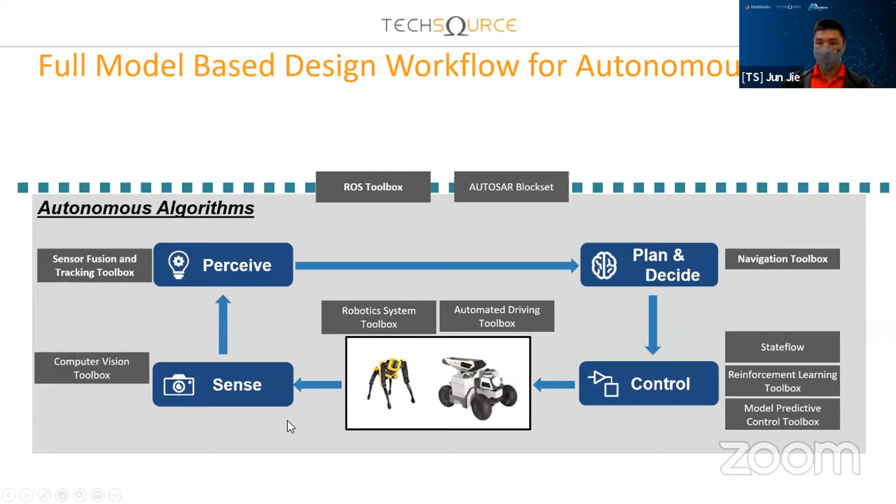So in terms of the navigation, these are the 4 key components that you will need in your design workflow in order to build the robot. So definitely you will have your sensors such as motion sensor, LiDAR, 2D or 3D, depending on what you are building. Then your cameras for image processing as well.

Then after collecting your data, you will need to process your data. So to process, your robot will need to understand all the data collected, such as for tracking an object or detecting an obstacle. And next, you will have to plan. So plan and decide stage. You track an object. Do you want to follow the object, or how do you want to follow, and how far do you want to follow?

So this one is like I showed you in episode 2, the turtle bot. It will follow the signs until the stop sign. So that's one of the examples. Then finally, after you plan and decide, you want to send in your controls on what you want your robot to do.

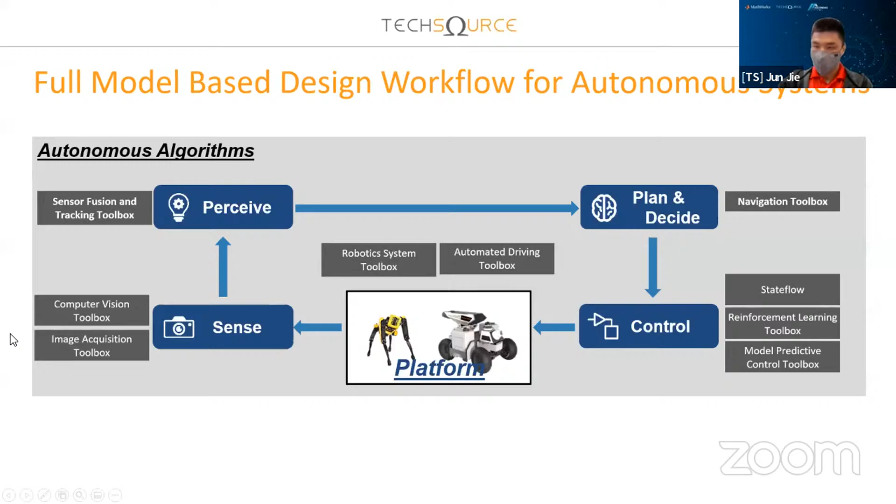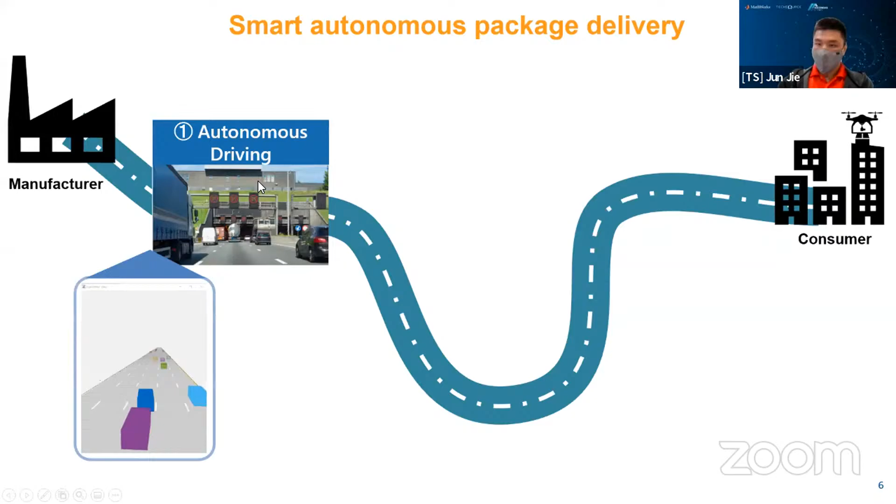So here we have a simple roadmap example for smart autonomous package delivery from the manufacturer until consumer. So this is the full flow. So in between, you can input autonomous driving. With autonomous driving, we can have the manufacturers send their products using unmanned trucks to a smart warehouse facility. At the smart warehouse facility, you will have the mobile robots to help unload and reshuffle all the goods.

And the market for autonomy is growing rapidly, and it will not be long until we are able to see fully autonomous driving or delivery of goods. And also, maybe in the future, you will have the last mile delivery using an unmanned vehicle drone.

Sorry. This is a common problem, ya Jun Jie. Yeah, I think too many videos inside the presentation.

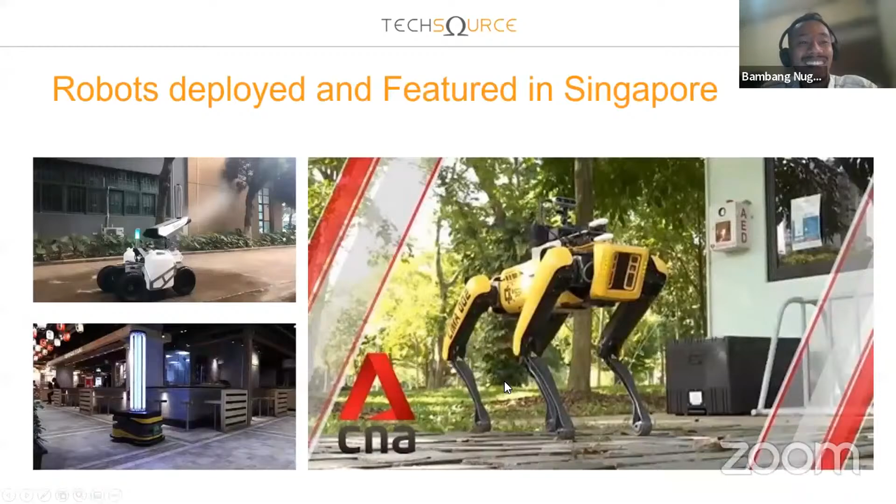Okay, Jun Jie, you can see my slides, right? Yes, very clear. Okay.

So, yeah, in the future, there's also a chance that we will have unmanned aerial vehicles, like the drone, to do the last mile delivery. Maybe in the future, you can have Grab or foodpanda using drones to deliver the food to your doorstep.

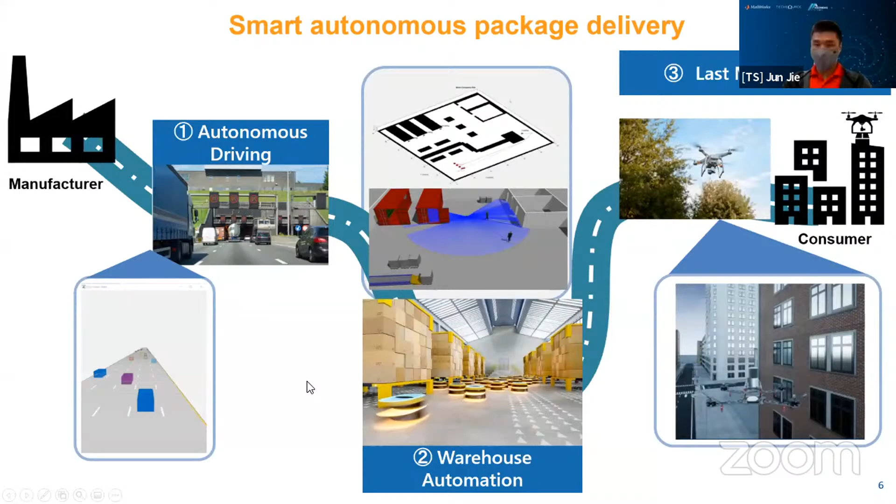So in this example, we will go over the common workflow for autonomous systems, which involves three fundamental blocks, starting with the first one, which is perception. So what can you pick up from this image that is relevant to autonomous driving? As for example, the two most obvious: for autonomous driving, you have to perceive with the camera to figure out, most importantly, the vehicles, so the cars, and the pedestrians.

So now let's look at how the autonomous vehicle views this image. Here we can see the cars in blocks and the pedestrians being highlighted in red. So first thing, the ability to sense the environment around the autonomous vehicle is very important. For a self-driving car, you will need to have cameras to see where it's going, and you will need to have a GPS to locate its current position.

And it is likely to have some form of radar to measure the distance and relative motion of surrounding objects, such as the moving vehicle, whether it is moving away, slowing down or closing in with the self-driving vehicle itself, and also the pedestrian. Are they in a stationary position or are they trying to cross the road? We also have LiDAR to build an accurate 3D model of the surrounding terrain.

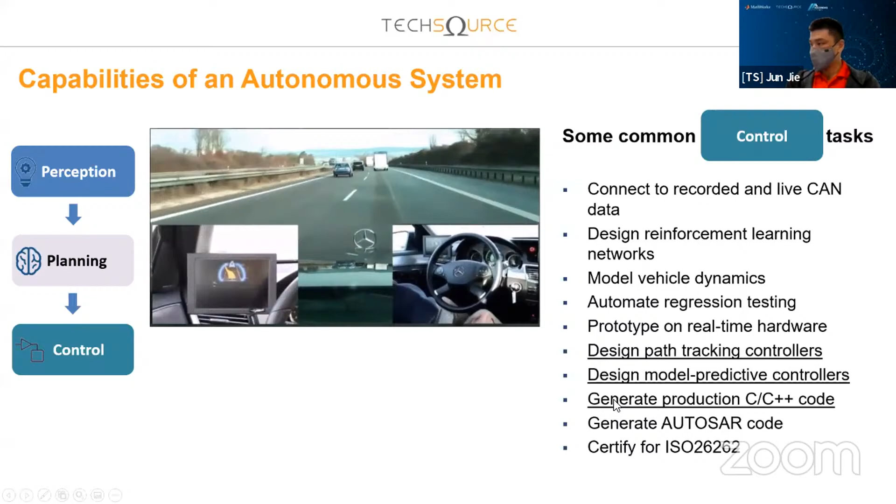So overall, the agenda of this part of the talk: we will discuss a reference workflow for development of autonomous navigation systems and learn how MATLAB and Simulink can help to design, simulate, test, and deploy all these algorithms for sensor fusion and navigation. All these with reference to various applications such as autonomous driving, indoor mobile robots or UAVs, like the 3 examples.

So there are multiple ways to bring your own data into MATLAB and Simulink and help develop and test all your algorithms for multiple objects and SLAM. So this can be done directly from sensors such as LiDAR, radar, cameras, inertial sensors, and GPS. We have a range of sensor models that you can use to generate data or test your system. So these sensor models will produce data based on specific scenarios you created for your own system design. Even with existing data, the sensor models can be used to further expand your test data set.

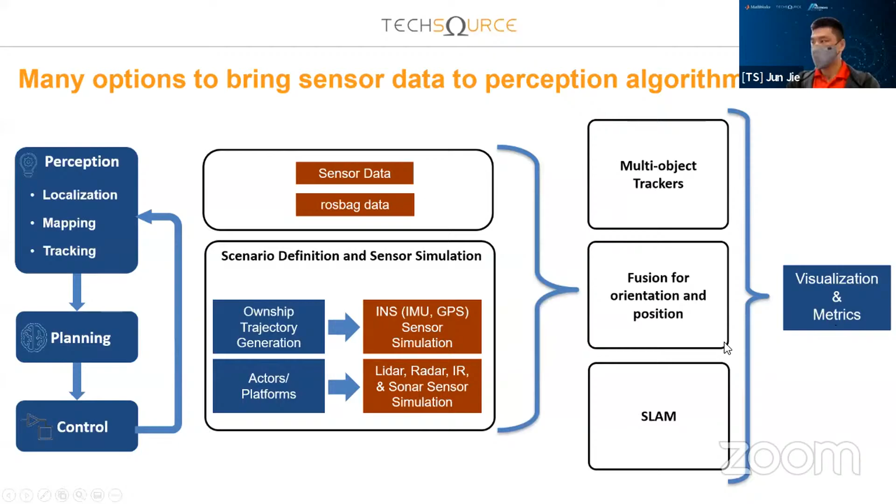So even when you have your own sensor data, there are still physical limitations, and it can be very valuable to generate data through simulations on extreme cases that stress your algorithms to the limits. Basically you can do simulation on extreme cases and generate more data instead of using the physical one, due to physical constraints.

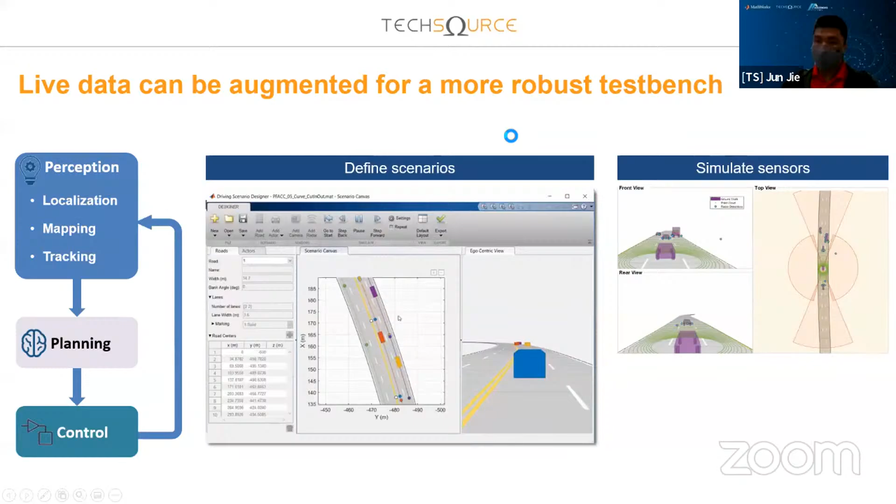No. Sorry, I think my presentation slide hung again. It's okay, Jun Jie. So you can try to reopen your slide.

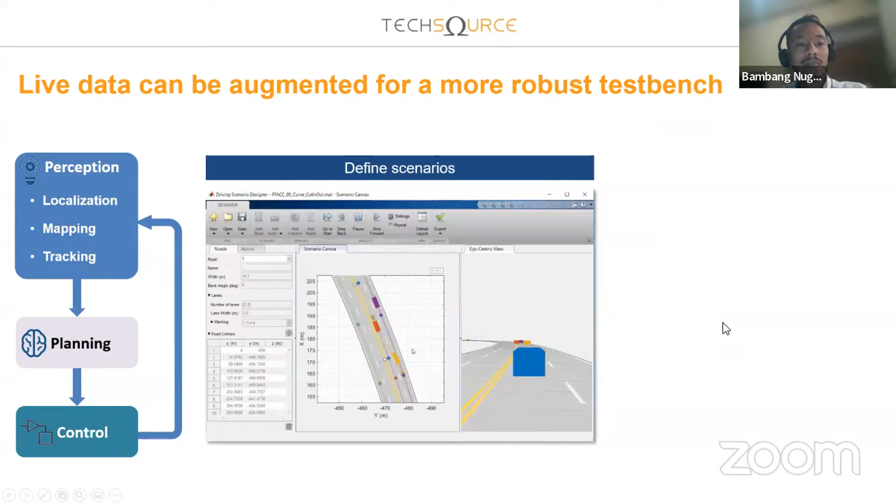Okay. Everyone can see, right? Yes. Okay, I shall continue. Sorry about that. That's like the second time already.

So for a localization algorithm, you can use a Monte Carlo localization algorithm to estimate the position and orientation of a robot. So this is one of a few examples. The algorithm uses a known map. So this is a known map of the environment and range sensor data. So this is likely the range sensor and odometry sensor data for robot motion.

So you have this most likely robot moving path. Each particle represents a possible robot state. The particles converge around a single location as the robot moves in the map and senses different parts of the environment. So you can see here from the blue dots. So here the robot is found, and then the radar and the LiDAR will form. The blue dots are where it senses and detects the environment.

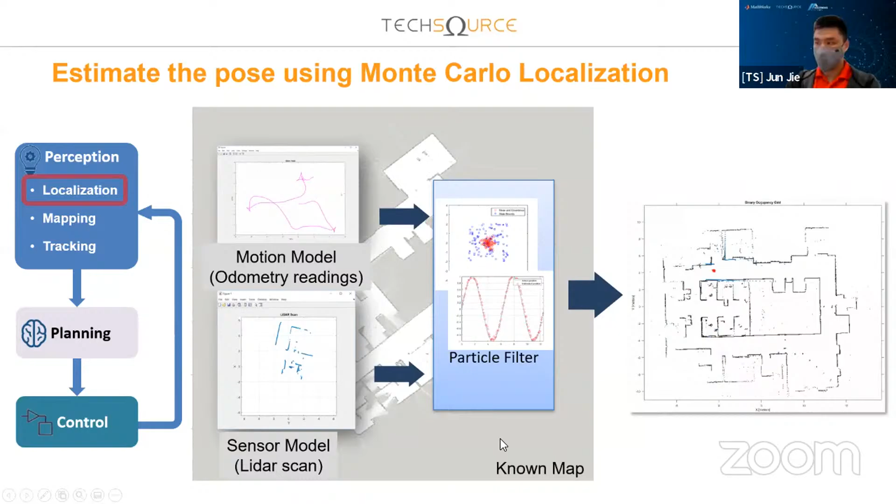So the previous slide was an example of 2D mapping. So now we have an example of a 3D map. So your autonomous system needs to understand the world around it. For this, you can perform 3D mapping; this is possibly a drone. In here, we are showing a 3D occupancy map from a point cloud. So these are all the radar detection points.

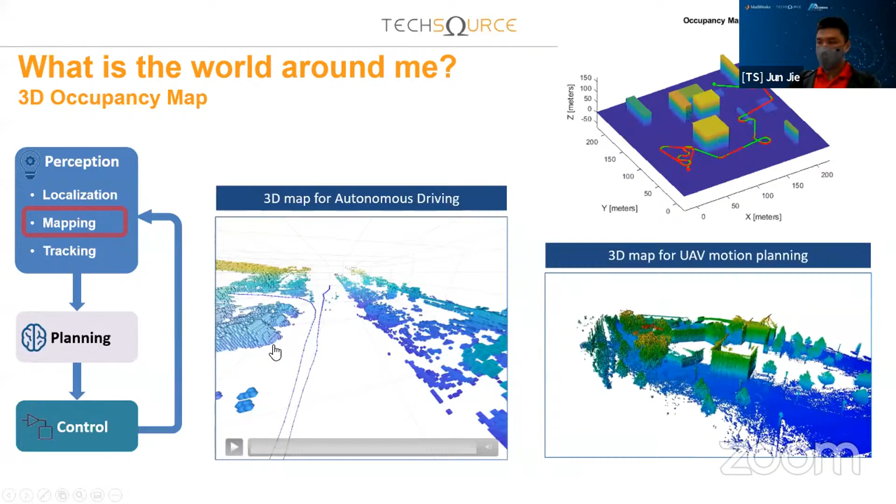So then what if I am in an unknown environment? So the robot doesn't have a known global map to explore. So simultaneous localization and mapping, also known as SLAM in short, uses both mapping and localization algorithms. Build a map and localize your vehicle in that map simultaneously. So as you can see, this robot is just mapping its environment as it moves past.

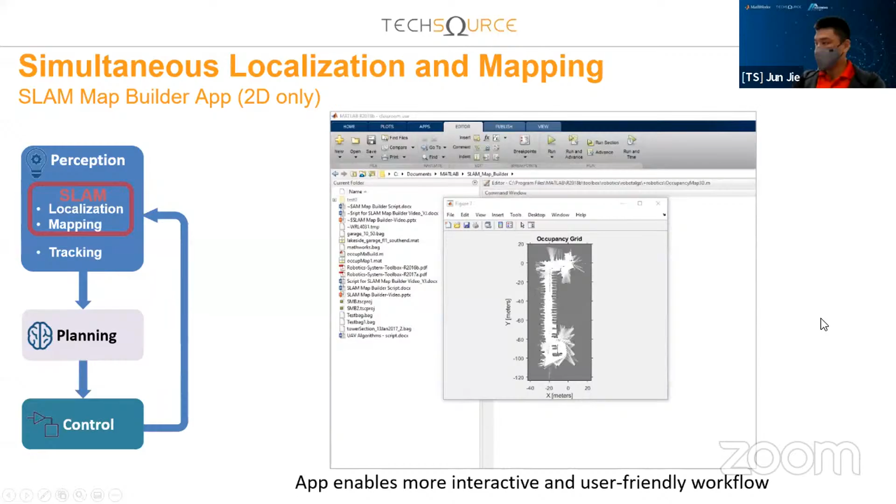So when you're done, you can just export the result, the occupancy grid, to use for path planning. Here is the example. You can just show the occupancy map, and then it will display the result. So this will be your final output after the exploration, and then you will use this map for your path planning.

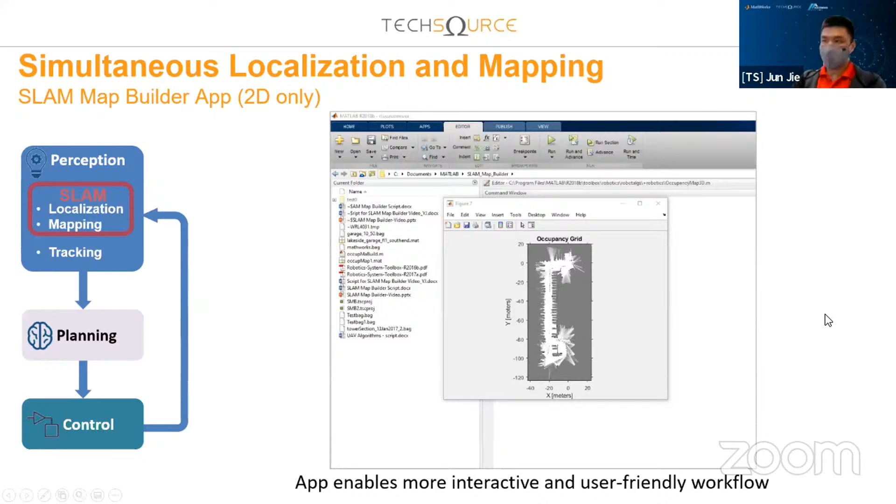So LiDAR is a sensor that is used for 3D SLAM because of the high resolution point cloud. And 3D LiDAR SLAM will require both computer vision algorithms for sensor processing at the front end and also navigation tools for the pose graph optimizer for the map, and also to refine the data. These will be the two main toolboxes if you are using SLAM and LiDAR.

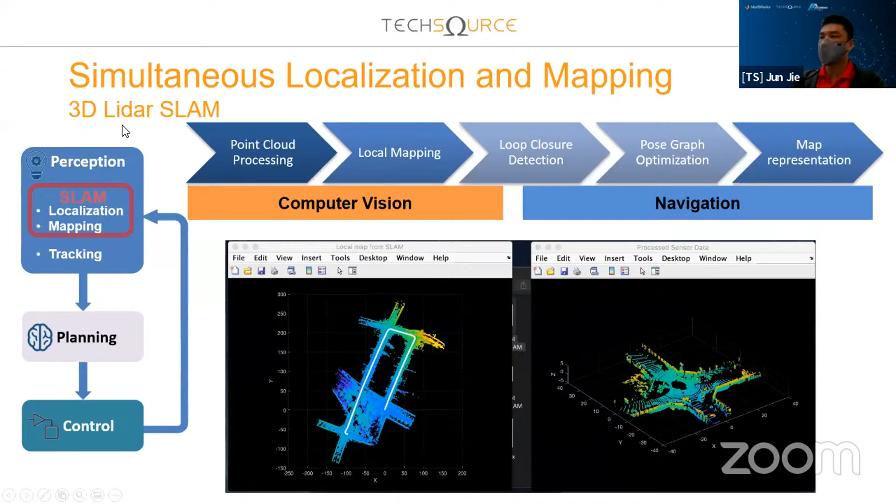So what is LiDAR Toolbox? LiDAR, if you do not know, is short for light detection and ranging. So for LiDAR Toolbox, we have a library of algorithms for LiDAR processing, which includes registration, detection, and segmentation. And we also have many reference applications for autonomous systems. So we have a lot of examples.

Calibration and labeling apps. So this is mainly for your segmentation, where you want to label your different segments or the objects inside the image during your image processing. We have high performance visualization because you can pair it with simulation engines like Unreal Engine or maybe even Gazebo. And then you can also do code generation and deployment support, and readers and streamer support. And yes, basically it depends on computer vision.

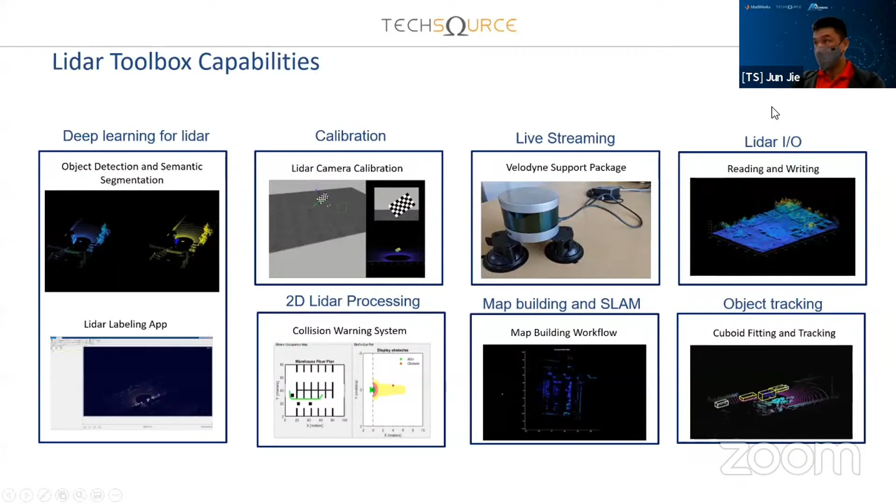So what are the capabilities of LiDAR Toolbox? You can use LiDAR for deep learning, such as object detection or semantic segmentation, and also object labeling. You can also do calibration and live streaming. So live streaming is probably like you generate your first-person point of view inside the vehicle. There's one example. But most importantly, you're using it for mapping. Build maps for your robots to understand its environment.

So a feature-based map building workflow generally looks something like this. You have your LiDAR sensor to move around and collect data, but you will need to remove the ground, because the ground is just everywhere you move on. So that is actually kind of a noise. Then you extract the FPFH features. FPFH is basically fast point feature histogram. And then you register and transform the data. Merging these data sets together, you get to build a map, such as this.

In addition to 3D SLAM, autonomous systems often use LiDAR for situation awareness of objects that are in the space surrounding the autonomous system. So let's say a self-driving car needs to be aware of oncoming and incoming vehicles. So our example is based on recorded LiDAR data. We process the point cloud by performing segmentation. We then fit a 3D bounding box like this, which is used to feed a multi-object tracker.

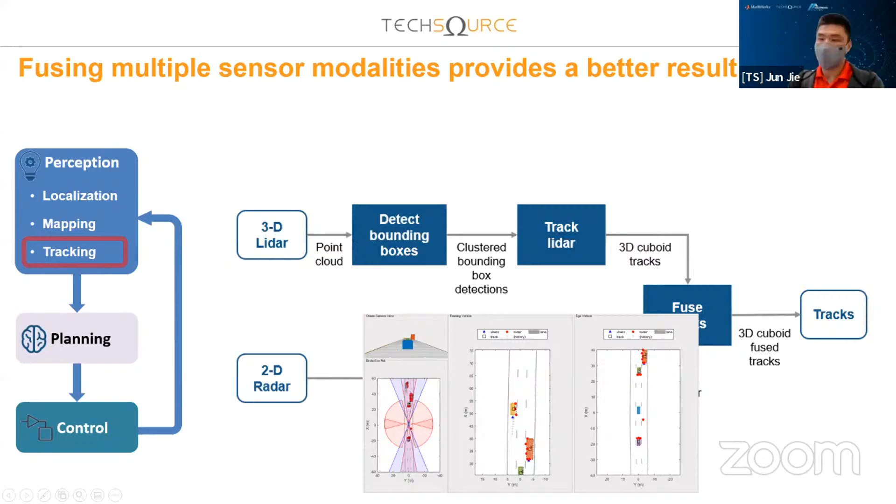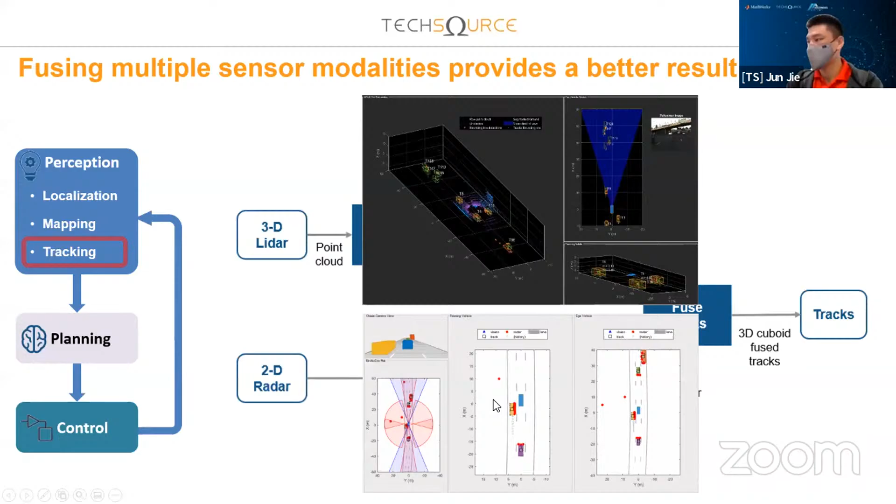Okay. So for radar, we track the extended object as a 2D. So this is the example. And for LiDAR, we convert the 3D point cloud to a rectangular bounding box. So this is the example. So now the output of each of the 2 previous examples was in the form of tracks. We can fuse the results at the track level to get a better understanding of the sensor data. We will see the results in the next slide. On one more note, while it is not demonstrated, a camera sensor is also used, like I mentioned just now, the vision.

Let's look at the result of fusing the radar and LiDAR data. On the left, you can see the ground truth of the ego vehicle's point of view. The green dots indicate the LiDAR point cloud, and the blue dots are the radar point cloud, radar detections. In the top right, you can see the specific LiDAR and radar data for the scenario.

In general, we expect the LiDAR to have better performance because the 3D point cloud is of higher resolution. You can see in the right display the ground truth along with the radar track, the LiDAR track, and the fused track.

At one point in the scene, the LiDAR detection migrates off the ground truth when two vehicles are passing. Before this event, the LiDAR track was more accurate. During the event, the radar track helps the track fuser to maintain its position closer to the ground truth. So this metric can be used to help you tune your system and achieve your desired performance.

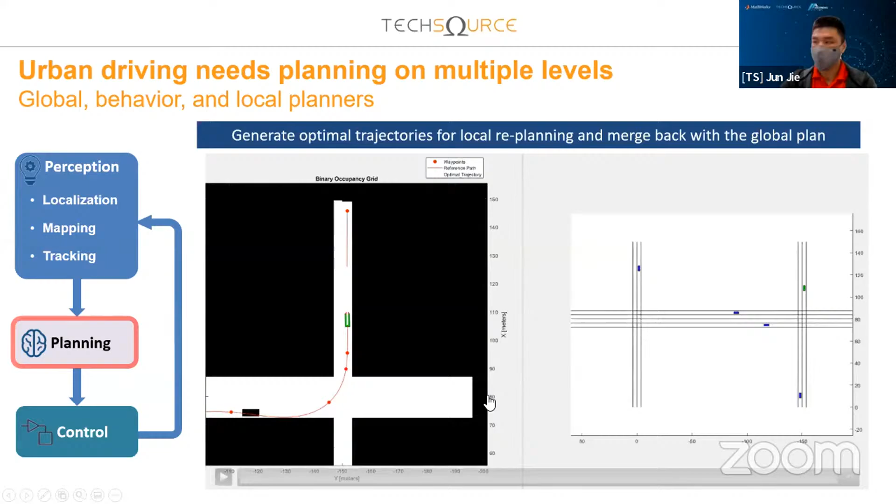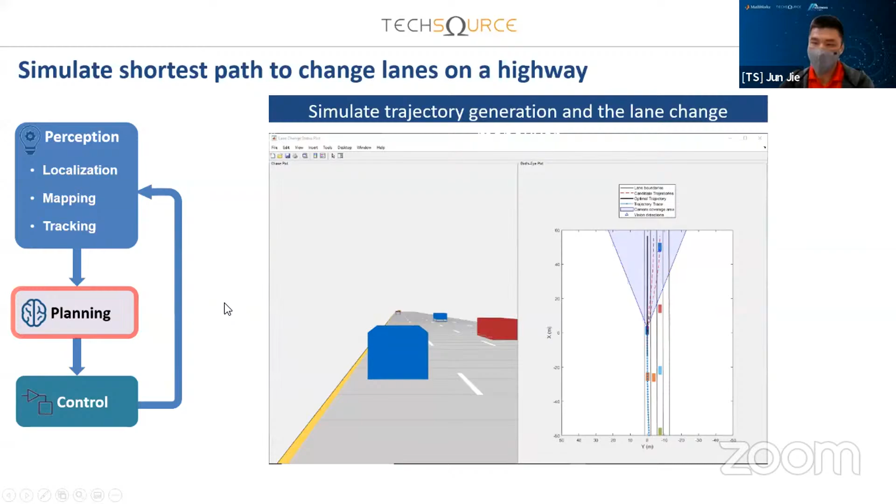We can use MATLAB and Simulink to simulate behavior planning or local planning for a highway scenario in a plot, like we saw in the previous slide, or in a cuboid world, like this on the slide. If you want higher resolution simulation, you might have to use simulation software like Gazebo, so you can connect MATLAB and Simulink to a more sophisticated simulation environment for higher resolution or more realistic simulation.

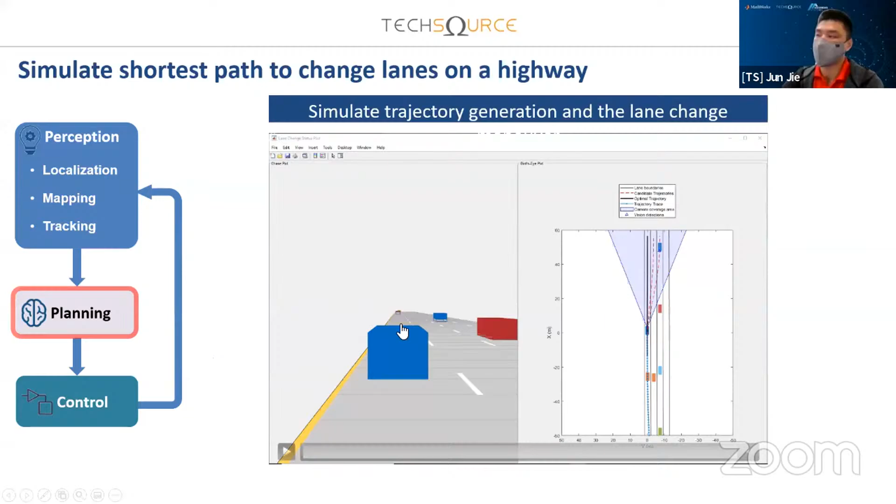You can also perform mission planning for unmanned aerial vehicles, UAVs. You can connect Simulink with external simulators and platforms such as PX4, and perform flight simulations. Mission planning is similar to how we check the route to drive to a new place on our smartphone, such as Google Maps. The low-level trajectory maneuvers are not included in this part of the mission planning. So you can see this UAV cutting through all the buildings.

But you can implement the low-level replanning using other motion planning algorithms, as we saw earlier, such as the vehicle parking or the urban driving vehicle. This is how last mile delivery routes can be planned for UAVs. Because for a UAV, you can generally allow it to fly above building level, so it doesn't really need to follow the map routes.

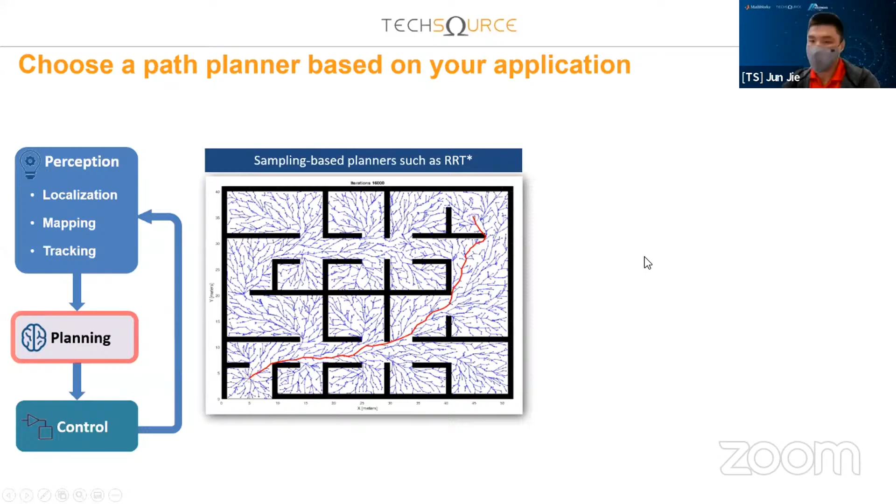These are various types of planning algorithms to use based on your application. Sampling-based planners such as RRT, or rapidly-exploring random tree, like this one, and informed RRT, a more advanced RRT, are commonly used for various applications. You can compare different paths using path metrics such as smoothness of the path and clearance from obstacles.

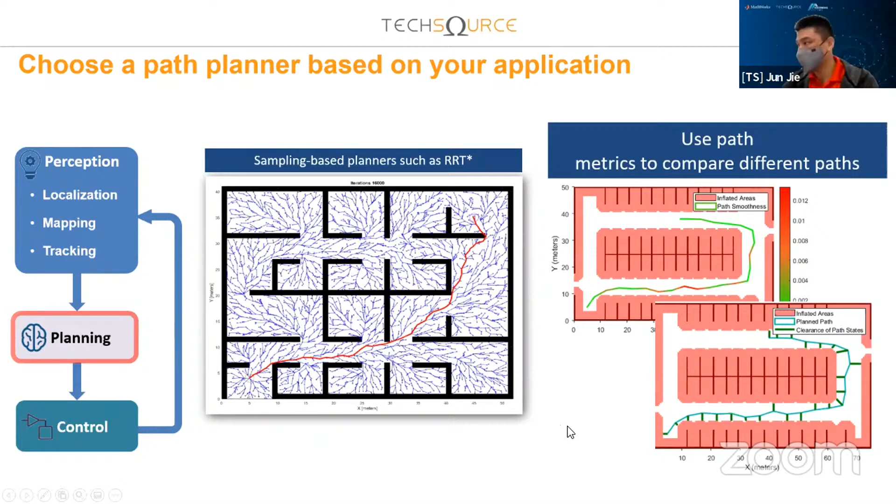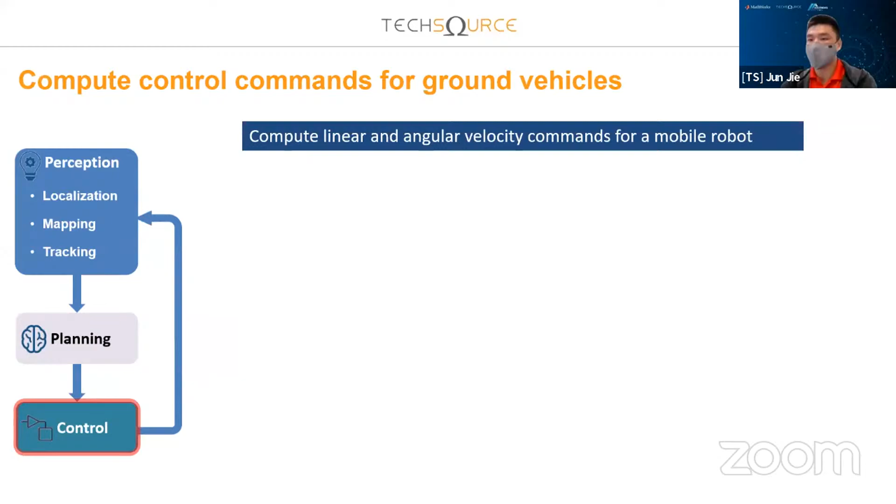Now, we shall talk about the third piece of the workflow, which is the control. You can compute control commands to follow the path that we generated using the algorithms in the last section. Pure Pursuit is a path tracking algorithm along waypoints. We get these waypoints from the path planner. In the previous slide, the RRT will form a lot of waypoints.

This computes the angular velocity command to drive the robot from its current position to reach a certain look ahead point in front of the robot. The linear velocity is assumed to be constant, but you can change the linear velocity of the robot at any point.

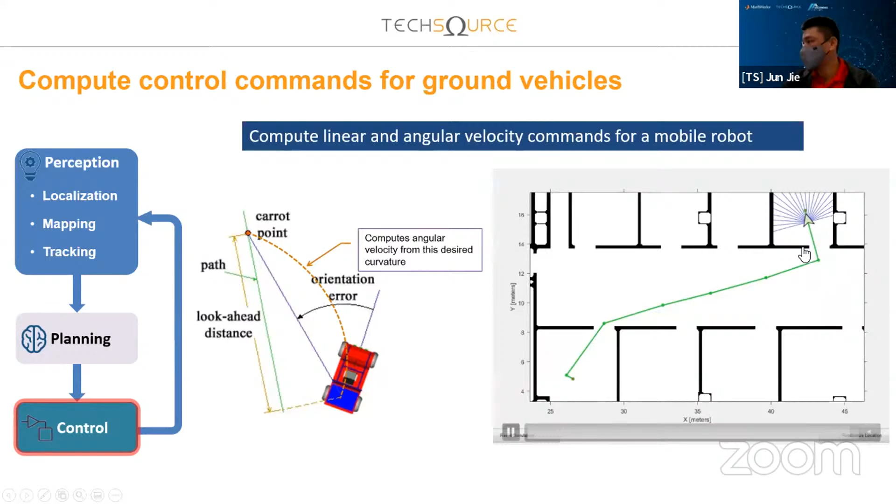Another important property in this algorithm is the look ahead distance. Here we have a fixed look ahead distance, which tells the robot how far along the path to track towards. You can think of this as a robot constantly chasing a point in front of it. With this look ahead distance and the waypoint being shorter, you can follow and chase the points directly in order to reach its final destination. From here, when you see the moment it detects the point, it can turn back immediately.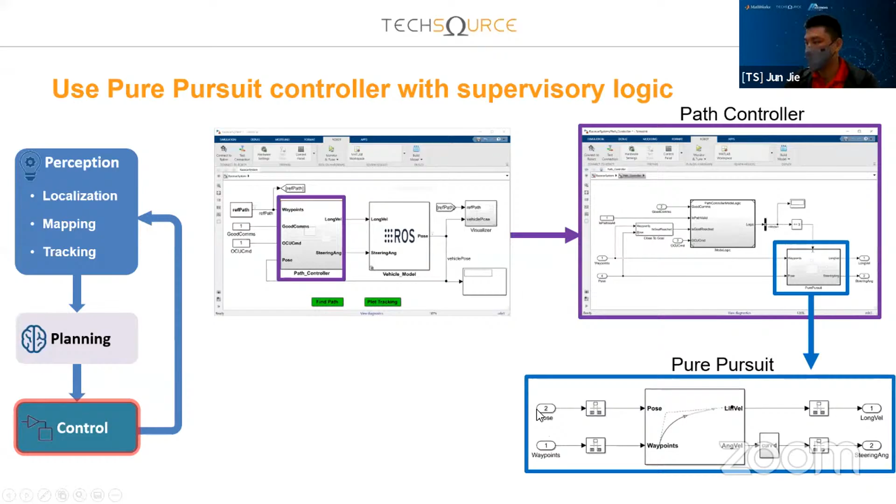Using model-based design, you can build a path controller model in Simulink using these blocks, and this includes the pure pursuit controller. This is a pure pursuit block. You can just input all your position and waypoints, along with a supervisory logic where we have Stateflow. You can use this to supervise these actions, to make sure it's doing the correct functions that you want it to operate.

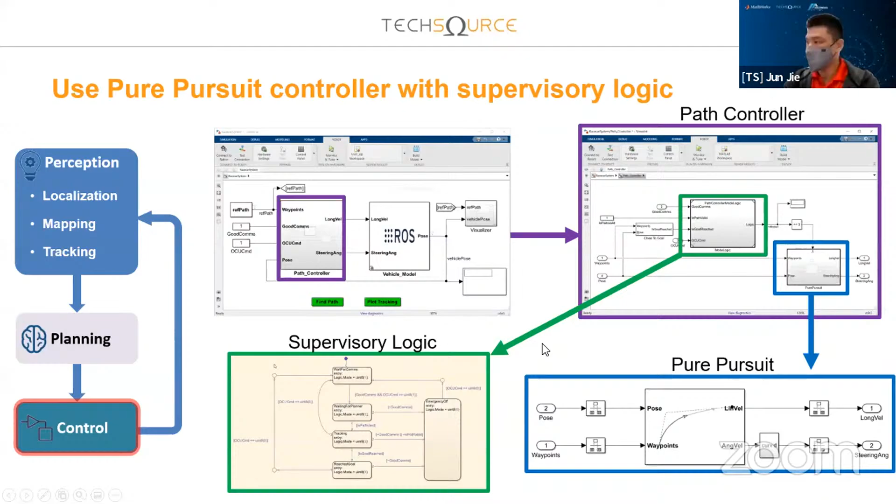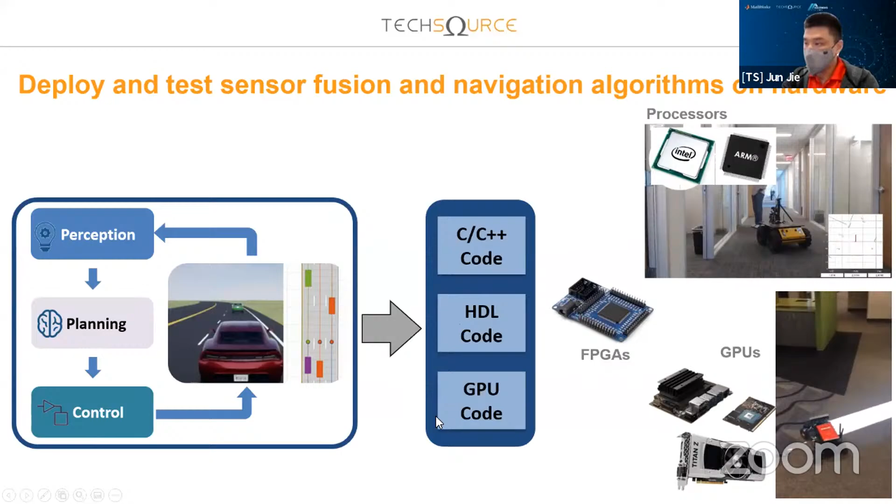So after testing and tuning all the workflows we discussed in the simulation, you can deploy them on the hardware platform. From this, you can connect to your external simulator such as Gazebo and perform the co-simulation first. And now we go on to the last part.

As you are aware, building an autonomous navigation system is challenging. Using modeling and simulation tools at early stages of your design can help you save time and reduce risk. You can save costs instead of building a physical prototype that will fail. You can do early simulation to get your data so that you can make changes before you build the actual model. The tools we provide span the full closed loop cycle of perception, planning, and control. The tools provide you with a test bed and algorithms, and we also have third-party simulation software to measure your system performance.

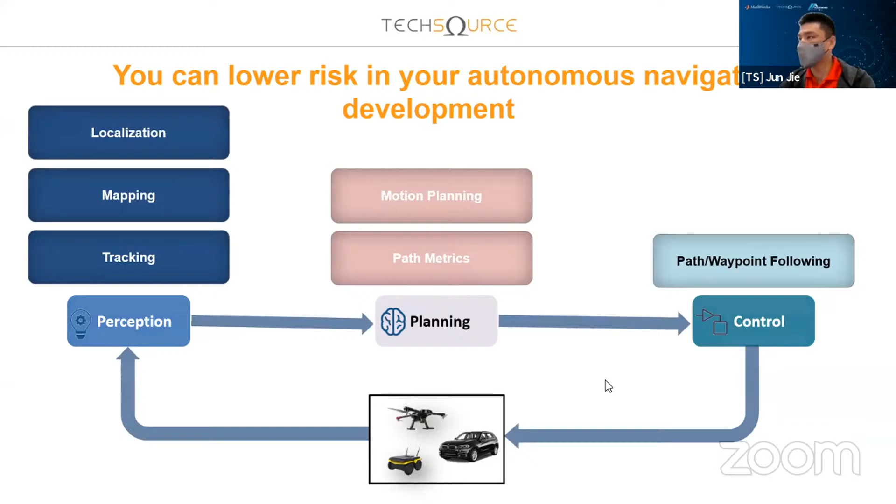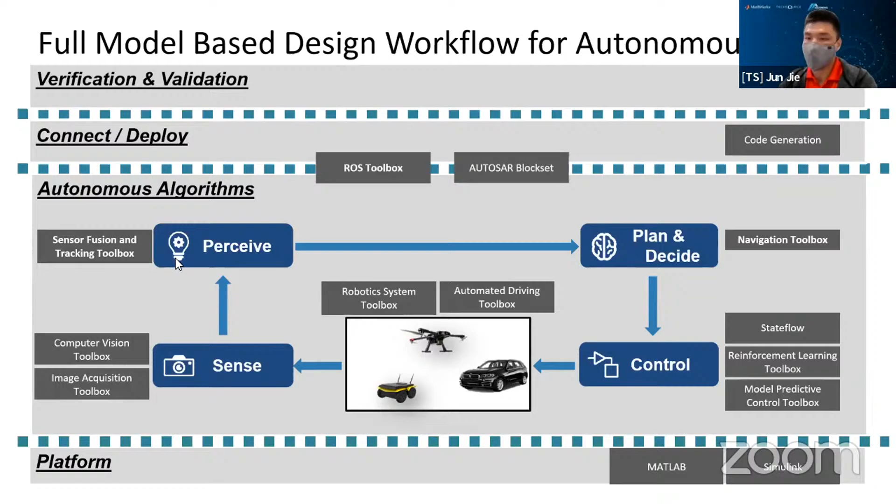So we have described the connection between perception, planning, and control. This figure shows some of the tools. Let's skip this part. Okay, so these are all critical aspects to build a system for autonomous vehicles. And there are many other resources to get started with. We have the Sensor Fusion and Tracking Toolbox, Navigation Toolbox, and we also have talks on the toolboxes that you need to help you accelerate developing your systems and controls.